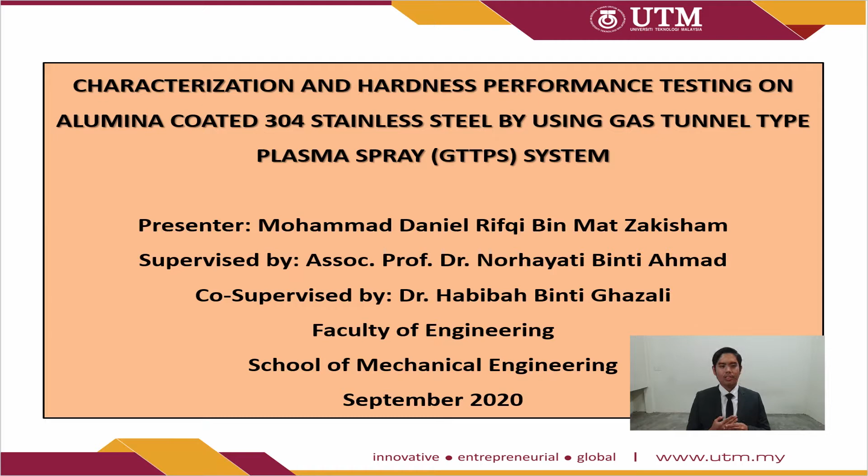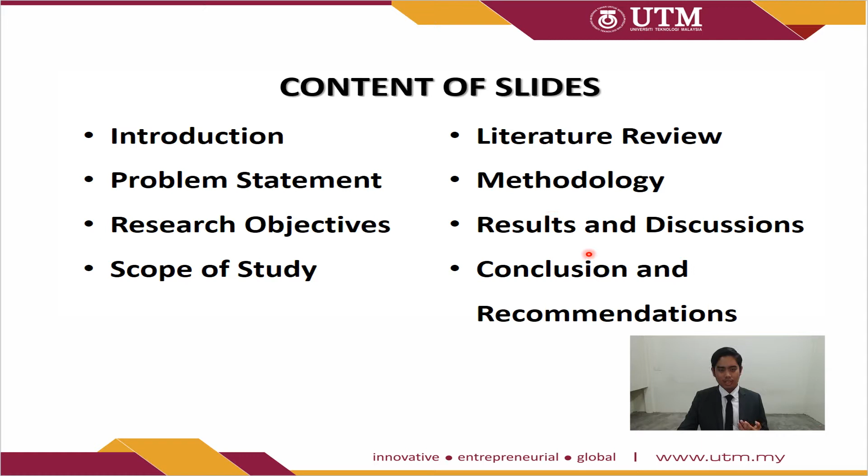Next, the content of slides will cover from introduction, problem statement, research objective, scope of study, literature review, methodology, results and discussions, and lastly, conclusion and recommendations.

Basically, a typical internal combustion engine produces a high amount of waste heat. This is because in internal combustion engine, about 70% of the thermal energy is released through the exhaust, coolant and surface radiations and to the ambient air as well. The wasted exhaust gas released to the environment can cause air pollution and increase the greenhouse effect.

The amount of rejected heat can be recovered up to 40% only. This recovery of wasted heat can only be achieved by using turbocharging technology. However, turbocharger usually operated at a high temperature up to 1050 degrees Celsius, and the material is made of tungsten. As far as we know, tungsten is heavy, expensive, and has a poor thermal insulation.

In order to overcome the limitations of tungsten, thermal barrier coating is done by using a new ceramic material which is known as alumina.

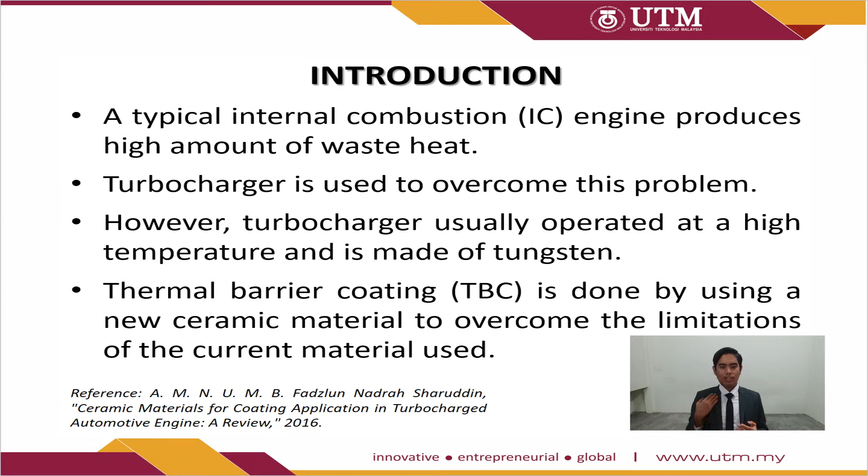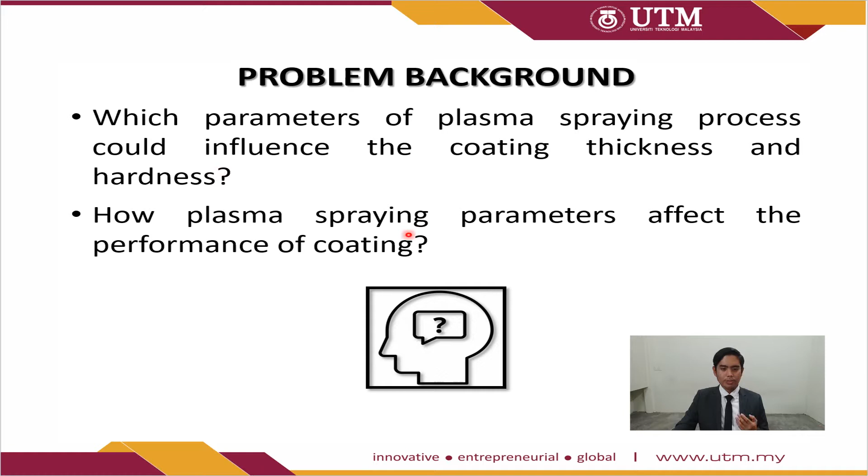Next, we will be moving on to the problem background. First of all, which parameters of plasma spraying process could influence the coating thickness and hardness? And secondly, how could plasma spraying parameters affect the performance of coating?

Next, the research objectives are to evaluate the effect of spraying distance on the coating thickness by using gas tunnel type plasma spray system. Secondly, to study the influence of spraying duration towards the hardness of coating layer. And lastly, to observe the surface and microstructure of coating layer.

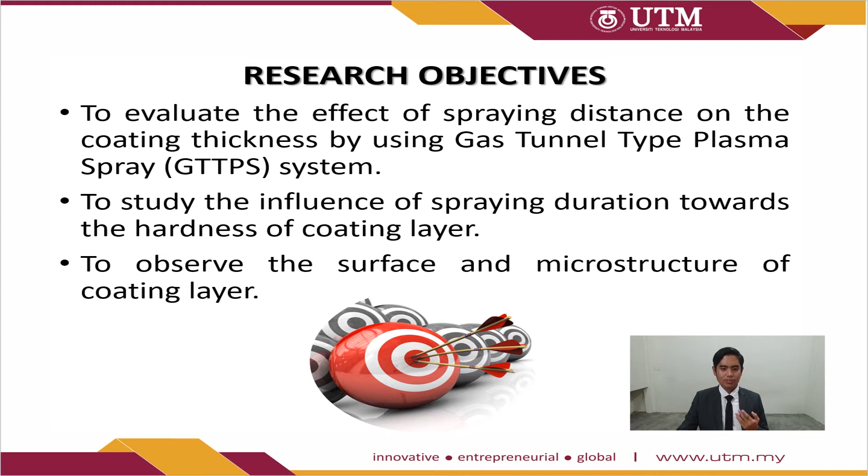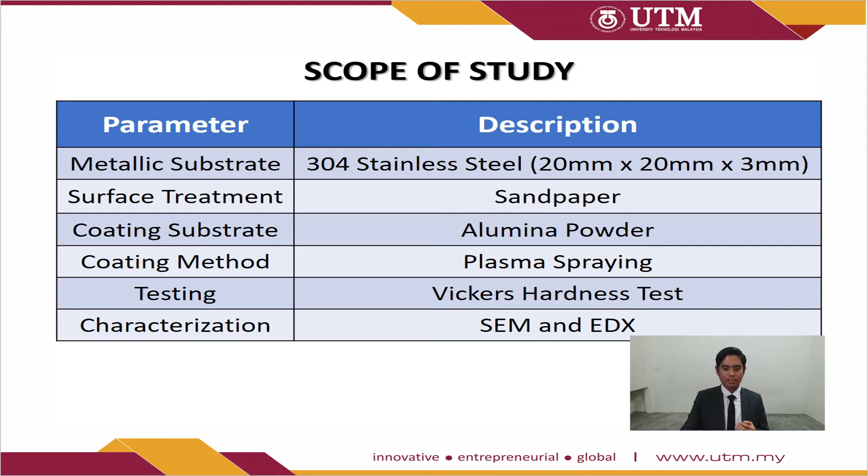Then we'll be moving on to the literature review. Basically, there are 5 main sources of literature review. Firstly, Akira Kobayashi in 2015 stated that the performance of coating increases by using gas tunnel type system as compared to the conventional type. Secondly, D. Thirumalaikumarasamy in 2015 stated that the spraying distance decreases when the coating thickness increases. The changing variables are input power and spraying distance.

Thirdly, Khandajou in 2017 stated that when spraying duration increases, the porosity will decrease. Then Xiaming Zhou in 2010 mentioned that the coating thickness increases as the porosity decreases. And lastly, Ozkan Sarikaya in 2004 stated that when the spraying distance increases, the micro hardness will increase.

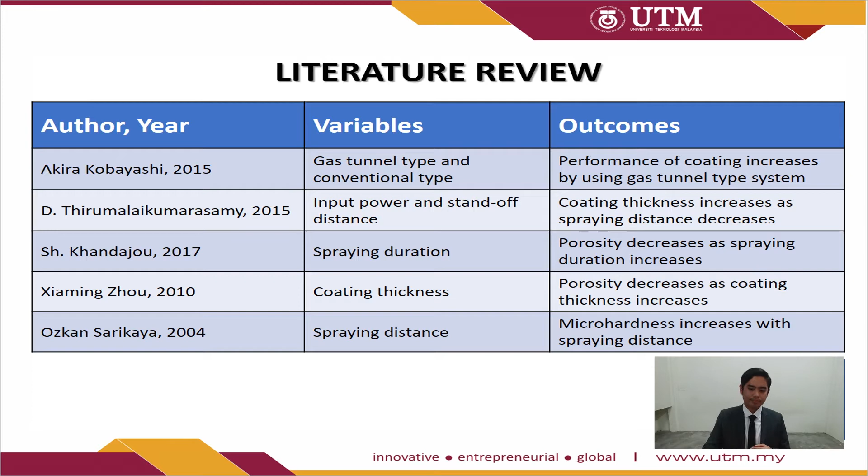Then Vickers hardness testing is conducted in order to evaluate the hardness of a coating layer. And lastly, characterization and microstructural analysis are conducted by using SEM and EDX.

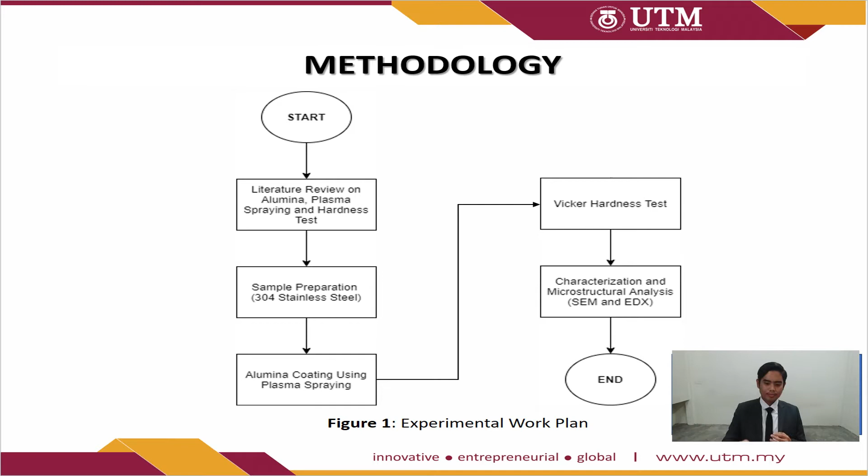In terms of results and discussions, first of all, we will take a look into the growth of aluminium oxide layer on 304 stainless steel substrate. As we can observe, figure 2A represents the cross-sectional SEM of alumina coating layer at spraying distance of 20 mm, while figure 2B represents the cross-sectional SEM of alumina coating layer at spraying distance of 15 mm.

Both samples can be distinguished by thickness, as alumina coating layer is observed to be thicker in figure 2B compared to in figure 2A. The coating layers are then further confirmed by using EDX line scan.

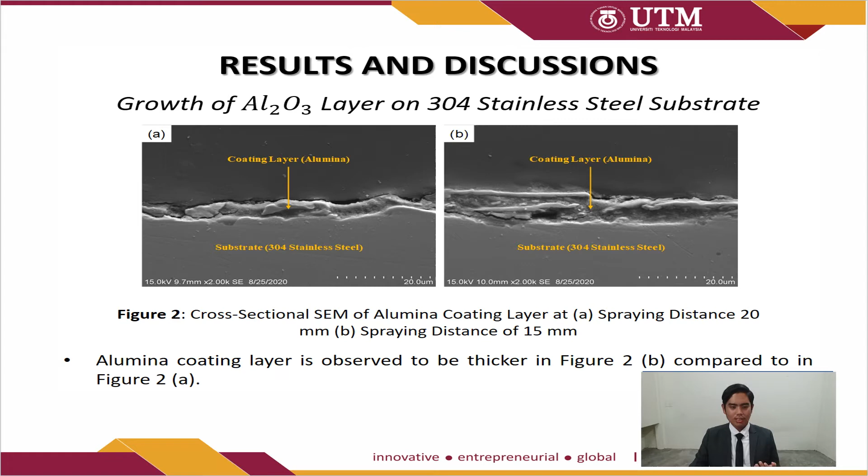In this section, we will be discussing the line scan analysis of samples with spraying distances of 15 and 20 mm. First of all, figure 3 shows the line scan at a spraying distance of 15 mm, while figure 4 represents the line scan at a spraying distance of 20 mm.

Basically, the coating thickness can be determined based on the sharp increase of aluminium line intensity as observed in figures 3B and 4B. Meanwhile, the coating-substrate interfacial boundary is represented by iron line intensity as shown in figure 3C and figure 4C.

Higher thickness is evident in figure 3 as a smaller coating distance is more effective because alumina powder can be properly melted and deposited. Next, the percentage of aluminium in figure 3B is higher than in figure 4B. This is due to the formation of a coating layer which is denser than the coating produced at a longer spraying distance. Next, the temperature of the deposited particle is higher at a shorter spraying distance.

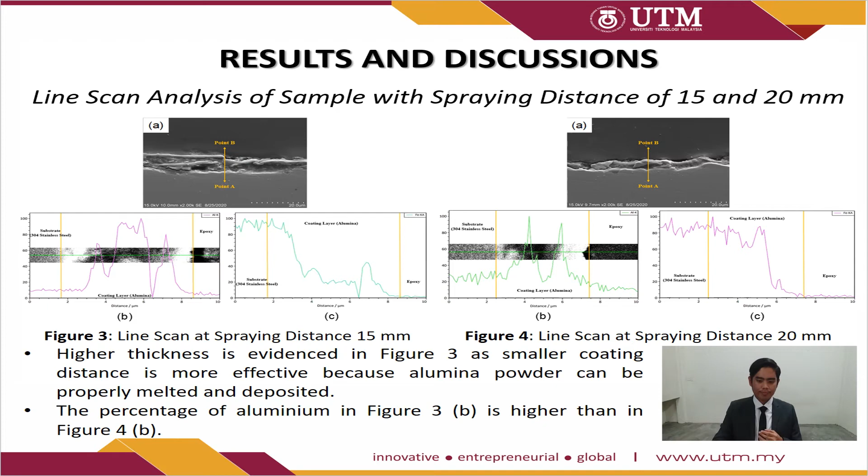Then we will be discussing SEM EDX elemental mapping analysis. Basically, figure 5A indicates the elemental mapping. There are three main elements which have been taken into account for elemental mapping. Firstly, oxygen, which is represented by turquoise color. Secondly, aluminium, which is represented by purple color. Thirdly, iron, which is represented by green color. Meanwhile, figure 5B indicates each individual element present in the sample in order to ease the identification of each element.

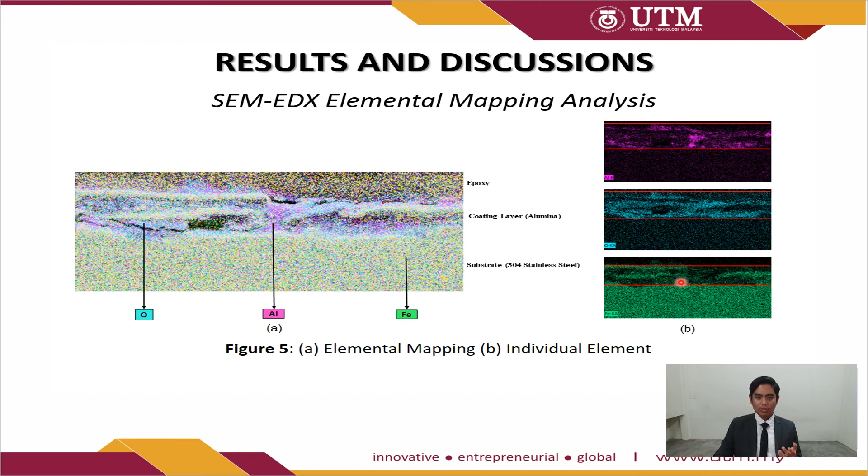Then we will be discussing the influence of spraying distance on coating thickness. As we can see, figure 6A indicates the average thickness of the coating layer at a spraying distance of 20 mm, while figure 6B represents the average coating thickness at a spraying distance of 15 mm. The average coating thickness in figure 6B is observed to be higher than in figure 6A.

This is because when the spraying distance decreases, the temperature of the deposited particles will increase. As a result, the deposited particles are thoroughly melted and crushed on the substrate surface. However, when the spraying distance increases, the temperature of the sprayed powder particles will decrease before they are deposited on the substrate surface, resulting in partial solidification. Consequently, a thinner layer of coating will be formed.

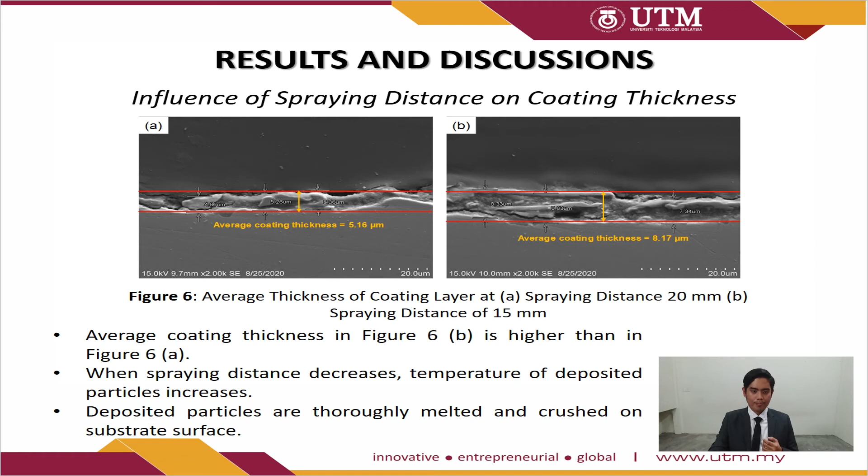Lastly, the influence of spraying duration on coating hardness. As we can see, figure 7 indicates the relationship between Vickers hardness and spraying duration. As the spraying duration increases, the Vickers hardness increases as well. This is because a thicker and denser coating layer is formed when the spraying duration becomes longer. To further explain the correlation between Vickers hardness and spraying duration, SEM surface morphologies of the coated samples with the highest and lowest hardness were evaluated.

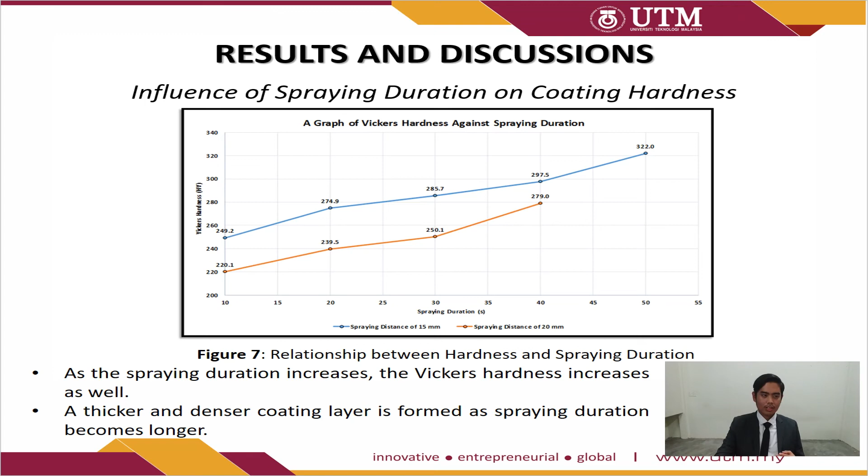Basically, figure 8 indicates the surface morphology of the coating, with figures 8A and 8B indicating the surface morphology of the coating with the lowest hardness, while figures 8C and 8D show the surface morphology of the coating with the highest hardness.

As we can see, the distribution of alumina coating on the substrate surface is more uniform and thicker for the sample with longer spraying duration. This occurs as the majority of flight particles are semi or fully melted in the plasma jet before impacting the substrate, forming a dense coating structure and enhancing the flow and compaction of the coating during the build-up process. Besides, the Vickers hardness increases as well due to effective flattening and solidification of the powder particles over the deposited layers.

However, if the spraying duration is shorter, there will be unmelted particles and pores inside the coatings as shown in figure 8B, therefore leading to weaker coating bonding strength. Lastly, the Vickers hardness values will decrease as the level of porosity increases.

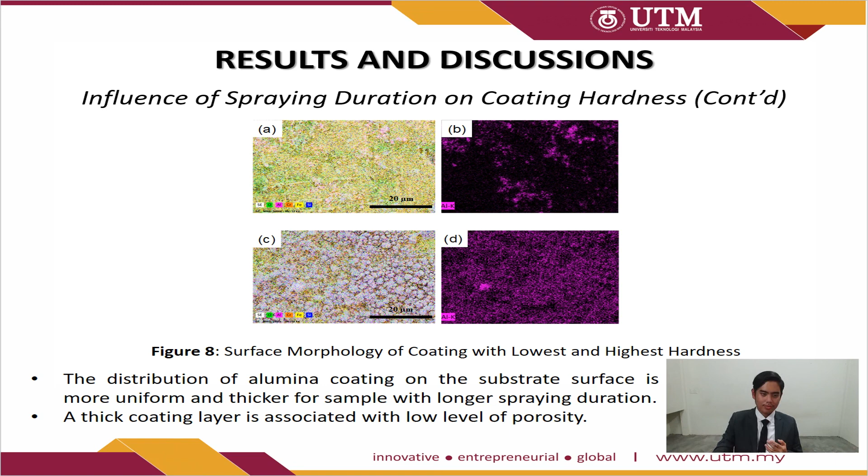To conclude, the reliability and compatibility of the new plasma spraying technology, which is the gas tunnel type plasma spray system, has been achieved. However, for future studies, the substrate holder should be improved, specifically in terms of material selection and mobility, to improve the quality and performance of the coating. Lastly, a range of power input and powder feed rate parameters should be taken into account in future experiments in order to provide comparison with the current experiment.